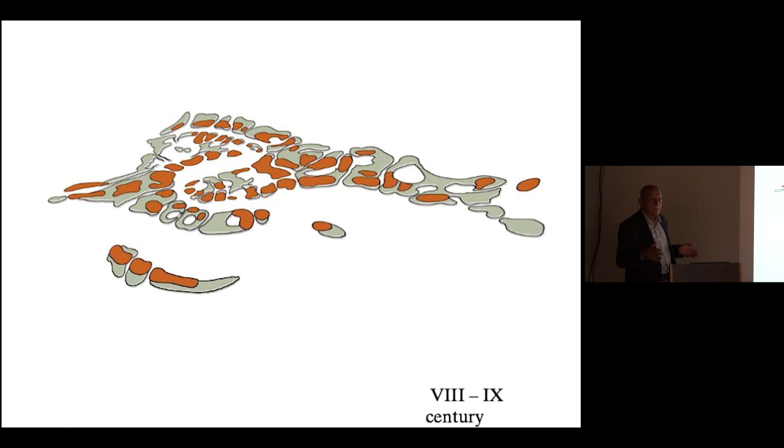And so in dark, you see the few islands emerging from the sea. The sea is not the sea, the lagoon is different from the sea. Then, going on, we have to run a little bit, sorry, because we have 171 images. So you see that in time, slowly, this reclamation of land became progressive, filling up all the gaps.

This image is absolutely fantastic. This is a pointer, maybe. No. So I have to use my finger. Look at this area here. Well, you see the little houses there, south, east. Do you see 3 lines of piles in the water of the lagoon? And what is written there is luogo da atterrar, site to be reclaimed. So this is the way of doing reclamations.

From a natural landscape, which is roundish, where they built the barracks, nearby there is a site, it's written there, the mountain of horns, because it was a slaughterhouse. They were killing animals and throwing the unused things, and so there was a mountain. But then the regularity of this, oh, here is very, very clear. Luogo da atterrare. And the mountain of horns on the right-hand side.

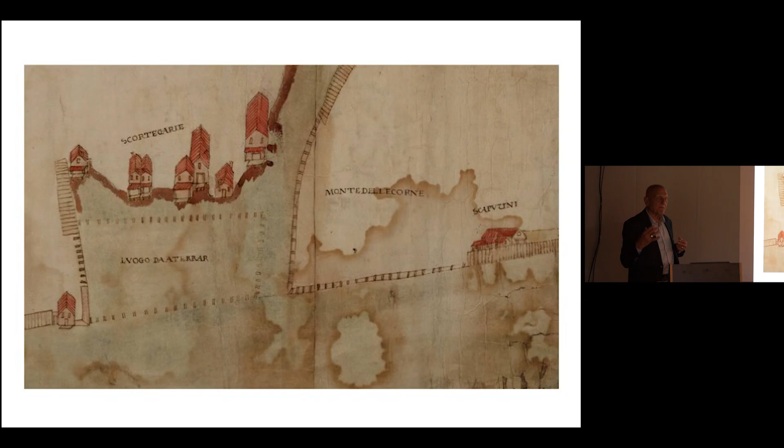So this is the reclamation of land all around the periphery of Venice, but also inside, in the city itself. The city itself, the non-city becoming city, had lakes, which were called lakes. Lacus Badovarium, the lake belonging to the family Badoer, and so forth. Slowly, slowly, they reclaimed land. How? Like that. Driving piles into the lagoon, creating a sort of a barrier, and then filling it with land.

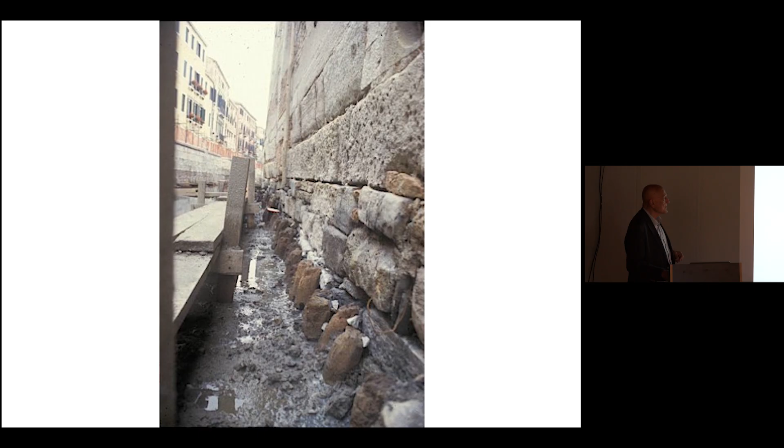Here is the same. You see the piles, you see the banging, and you see that this place is becoming an orchard on the right-hand side, and then a city. This is a limit of a bonification, of a reclamation of land of the early 13th century.

The canal was emptied to remove the mud, which is something that you should do every 10 years, because all the sewage goes into the canal. And so it fills up. And you see the piles there, creating the land to build later on the church of San Marziale. And that's the way.

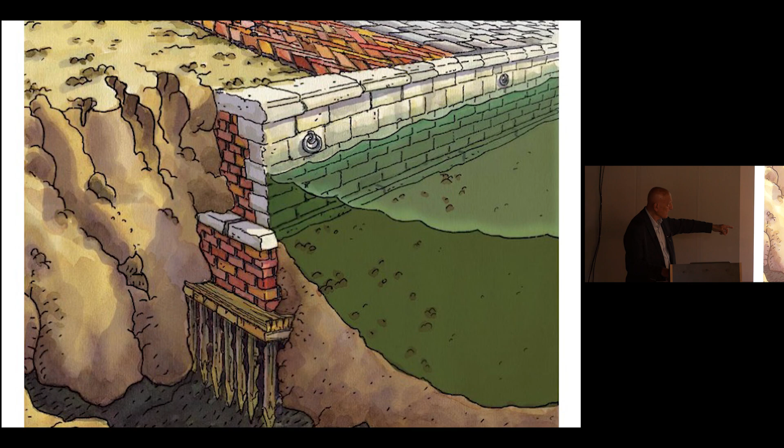You see the piles, you see a double layer of boards, thick boards underneath, then the plinth of the wall, creating a separation between the lagoon water and the land. Land to be walked on, to be built with houses, churches, palaces, and so forth. And that's it. Ca Gussoni, middle of 16th century, you see, what do you have underneath? A forest of piles.

So this is a good image because it shows you, with a script, piano delle case. It's not written floor of a palace. It's written floor of a house. So it's a minor building, let's say, facing a canal, paludo, water, and you see the piles. Piles driven one very next to the other, and then a double layer of boards. And up to it, you will build your foundation, which will reach the fascia, and the porta, which is the door of the house.

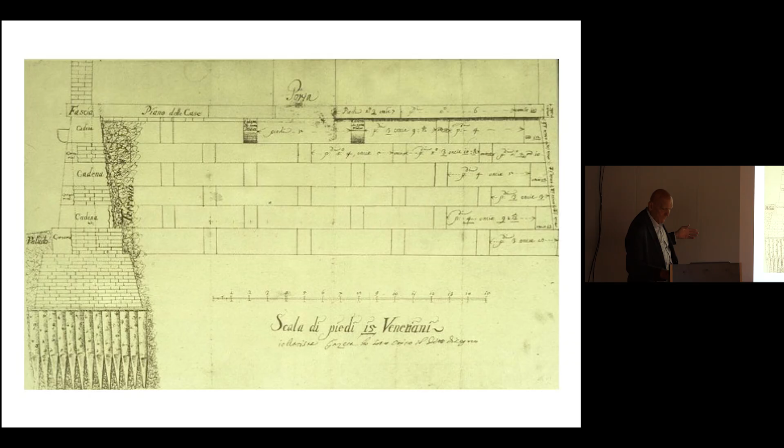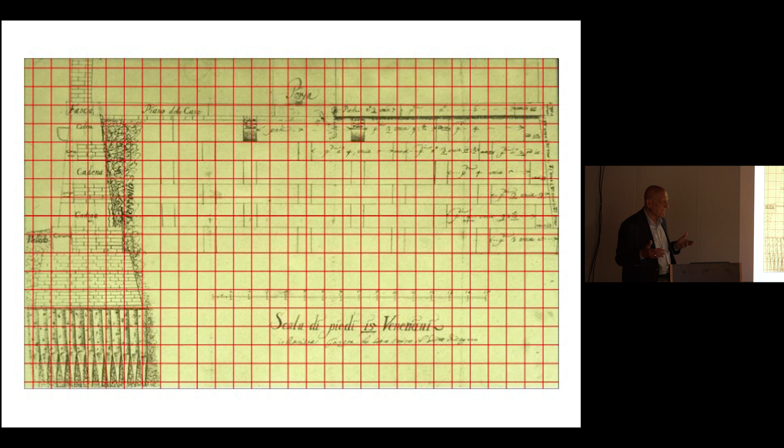That's it. If you put a measure, the squares are feet, Venetian feet. 1 foot is 35 centimeters, more or less, 34.77, somebody may say. So you can see that this foundation, apart from the piles, is 3.6 meters high, double my height, without shoes. Okay? So you can imagine the amount of work needed for such a site. The amount of materials, the amount of sweat of the workers. This is the miracle of Venice.

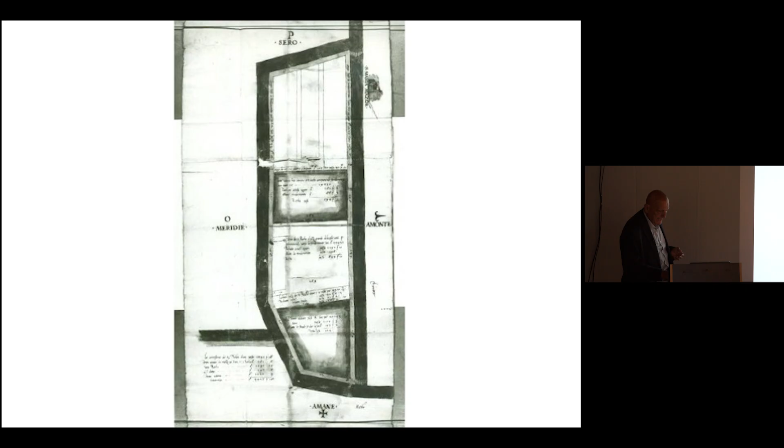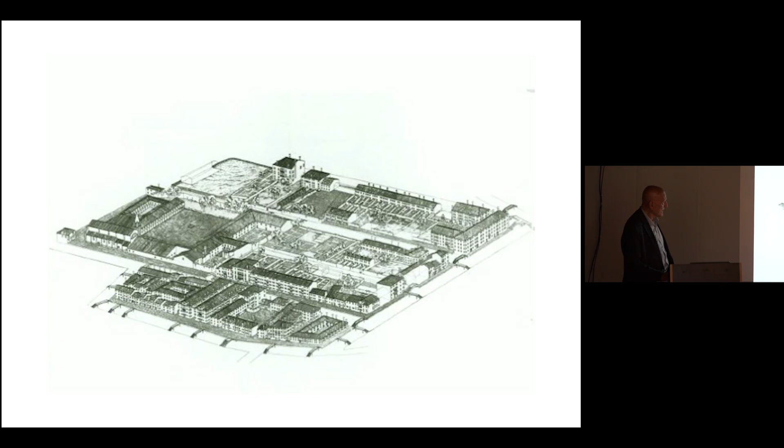Another reclamation of land is Secco Marina. You see that it looks very much like Verona, more or less. A Roman kind of planning, regular rectangles. And this was in 1523 to 30. The land was reclaimed and sold at very low price to the workers of the arsenal, because the arsenal was nearby.

And there is a letter of, again, a widow, writing to the Republic, asking for help. And she said, I'm living here with my 3 sons, and if I was not the owner of this flat, which Manoli da Candia... Manoli is Manolos in Greek, da Candia is Crete, right?

He left it to us, and I suffered a lot from the lack of water. Morimo de sete, we are dying of, come si dice, sete? Thirst, thank you. So the Republic decided, 10 years later, in 1547, to build a cistern for the poor people of the area.

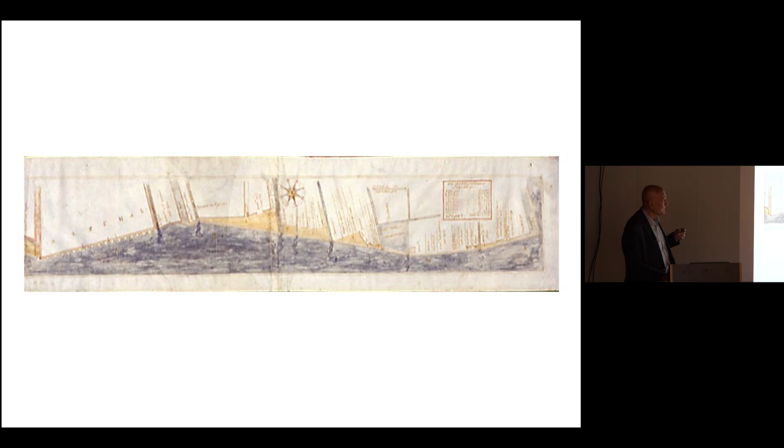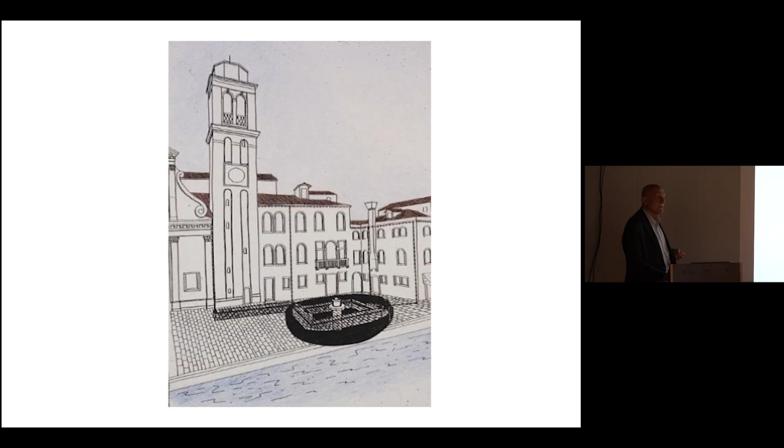Now, you may remember this, the ancient mariner. And this is the second point of my lecture, the lack of water. Lack of drinking water. So every Campo, San Giacomo dall'Orio or San Trovaso, each one has a cistern for the poor people. The cistern was self-refilled by the rainwater collected by the roofs and the paving, which went inside the cistern itself.

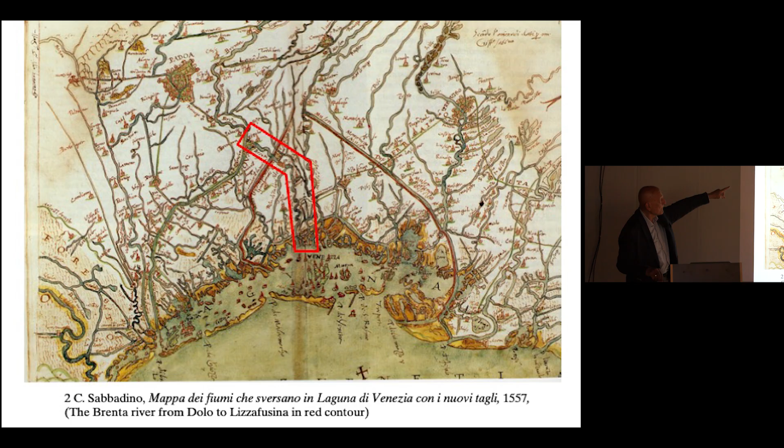The drawing is very nice. Do you have our little book? Venezia Come? Not here, sorry. You have it. It's here with me. This is one of the drawings of that booklet. We call it the booklet. I wrote it with my wife.

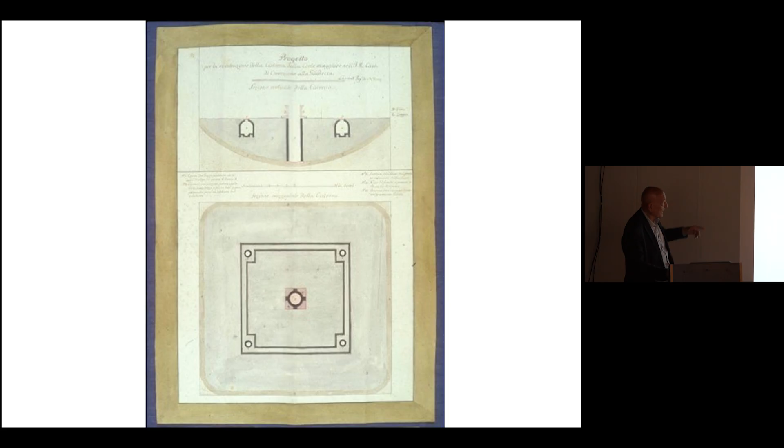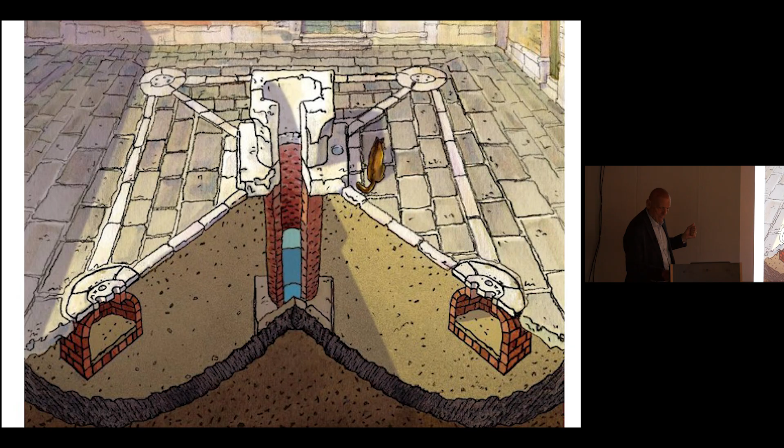So, in this case, it's a covered box. The box is built with sesquipedali, the big Roman bricks. And also the upper part, now disappeared, of course, was covered. But at the right end, you see the shaft. And you see the sand. You know how the cleaning place is called? The sand in the middle here. It was called sponza, the sponge, collecting water. So, Roman. The cleverness of the Venetians was to copy a Roman project respecting the site, respecting Venice.

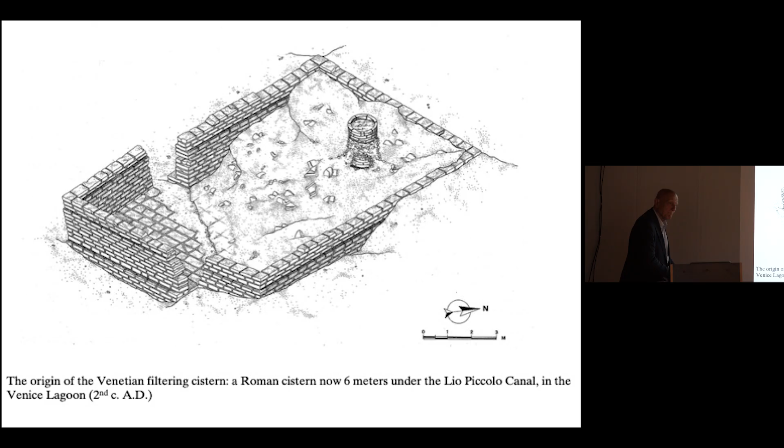So now outside in the squares, as I saw one in Cartagena de Indias, one of this kind of cisterns, also in a watery environment. But they said, if we are going to do that one, we will lose land. So they just pressed it underneath the land. And out came the Venetian cistern with the paving. Now you have a large example. This is the Roman museum in Altino. Those bricks are the bricks of the shaft. Those are the pilelle, the slabs to get the water.

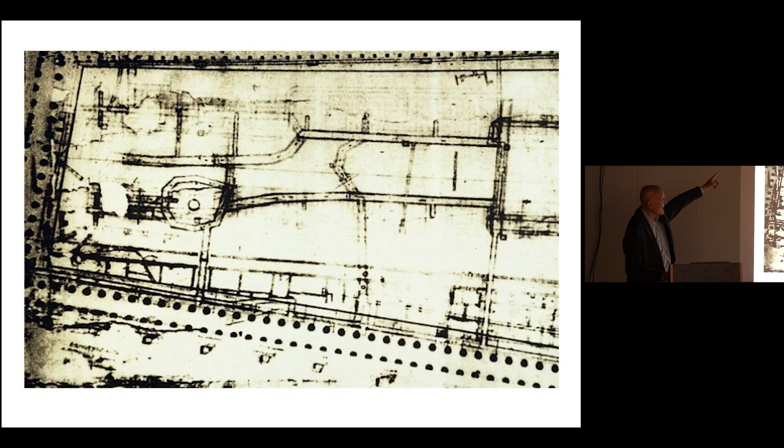Here you have the Procuratie Nuove, we're going to talk about that. The houses of the procurators, Procuratie Vecchie, and we are approaching the Basilica of St. Mark's on the right-hand side. Each palace had at least one cistern. And look at the iron ropes to bring the water from the wellhead up to the first, second, third floor. Because a bucket or 2 buckets of water weigh 20 and 20 kilos. So they would have an engine to take it up.

So in the late 13th century, there is a decree, a law of the Senate in Venice, in which all the houses, old and new, must be provided with a stone gutter. That's the gutter in stone, the white, you see? This is a medieval one, early Gothic. In order to improve the circulation of the boats in the canals, because the water was spread into the canals, but also in the streets. And I add, also to increase the collecting of fresh water. Why waste it?

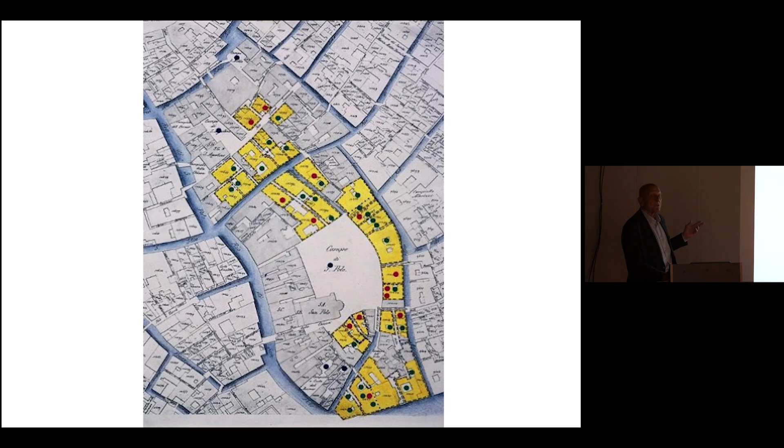Well, this is another cistern raised up because of the rise of the water in Venice, so they raised also the cistern. And when the acqua alta, the flooding, ruins the cistern, a special squad will come from the Arsenal. They will insert this primitive pump, and they remove the salty water from the cistern, and then, utilizing fresh water, they will clean the cistern, utilizing the pilelle, so all the sand will lose the salt, and that's it.

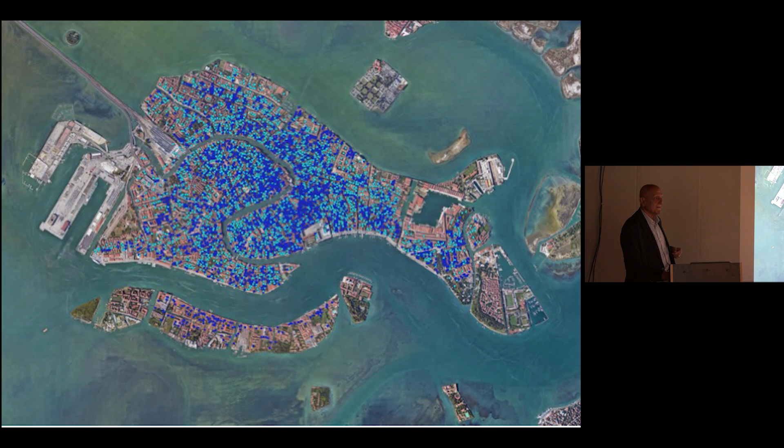This is a survey of all the cisterns. But now we have to talk about the son of Jacopo Sansovino, and he says that, you can read it.

I hate presentations when the speaker reads and also you read. So you read it and you know.

The double Venice. He simply says that because of the campi, the squares, look below it, it's in English, with that space you could build a second Venice. Another idea, the double Venice, by Francesco Sansovino.

So now we have to talk about the miracle of the double house. Listen, the double house was invented already in medieval times. Romanesque palaces with two noble floors. For the two brothers, they will share the entrance, or they may even have separate entrances from the water and from the land. Two noble floors, one on top of the other. Each one will have their own staircases because they wanted privacy.

So let's double. We even have a few remains drawn by John Ruskin of a terraced house, Gothic, early Gothic, which is double. Two noble floors. What does noble mean? It means simply higher. Instead of 7 or 8 feet, it will be 9 or 10 feet. So 3.10, 3.50 meters each floor. And then you will have a top floor, a mezzanine, for the servants, where the servants will sleep.

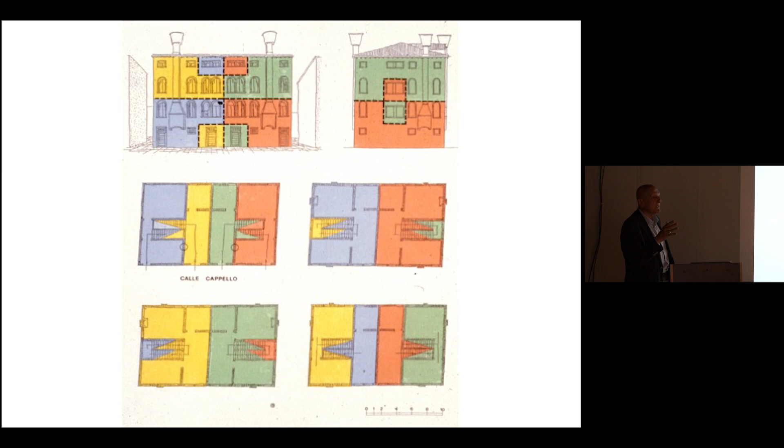As the money they paid yearly, I was wrong before, I said ducats per month, per year. Here they paid 40 ducats per year. Equal communism. Equal area, equal money, equal houses. This is a double house, which was,

this is a beautiful drawing of my master. I added the colors again, and I added the cistern, which is wrong. Don't take pictures of that one, it's my mistake. You see the gallery in the cistern? The cistern is correct. It goes between the plinth of the foundations. But the gallery, which is called il cassone, I forgot to tell you, the big box where there was the first cleaning of the water, that one is wrong.

My first article, quite thick actually, I wrote in 1983-84. It's Canoni d'acqua, canoni da necessario, scarichi veneziani in età moderna, dealing with these kind of things, the water supply, the toilets, and other things. So by that time, I was ignorant. I was more ignorant than I am now. Still a bit ignorant. Keep digging, you will find more.

Always, really. So, if I may suggest, we say, so far we know that. Okay? What I mean is, don't say, the Venetian house is like that. Because you always discover that there is another one, which is not that. It's different. But this is the model anyhow. This is the model of the double house. Could be bigger, could be smaller, but this is it.

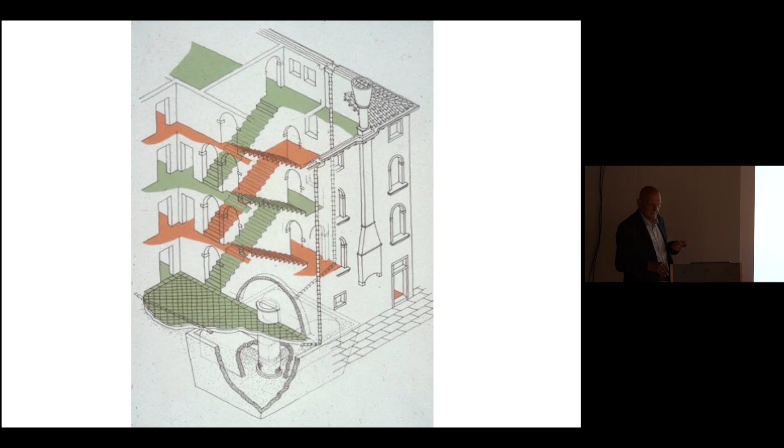And look at the shaft, cistern, wellhead, half for Mr. Green, and half for Lady Red. This is the second invention, the internal cistern and the double stairs. Oh, this is the same house as Cappello. We did this drawing in the catalog.

My colleagues were describing to you, dietro i palazzi, behind the palaces. My wife studies in the archives. She did the archival research. And we were able, with her archival research, with a team of 8 researchers, paid by the municipality's exhibition, so we had the money, it was the occasion, we discovered that the dates that my master, Trincanato, gave to the buildings were wrong.

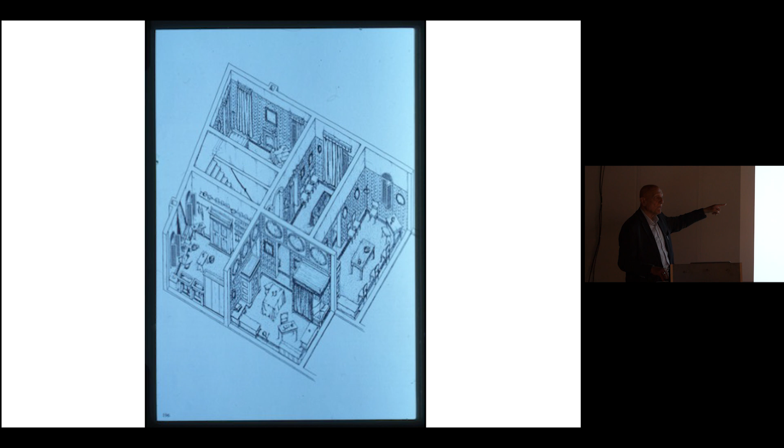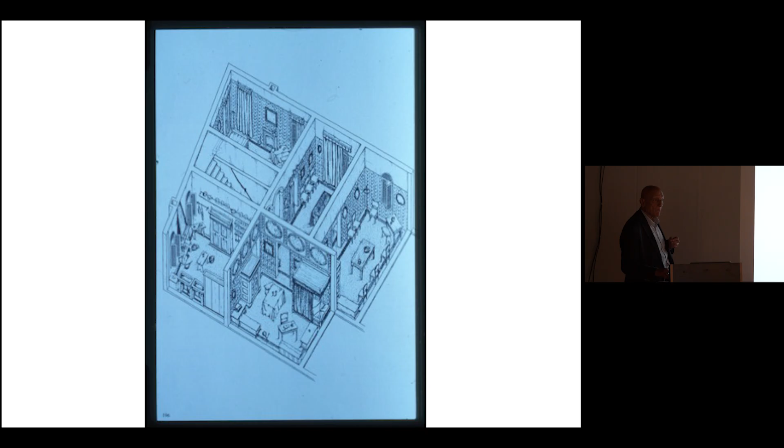She said that those houses were built in the early 17th century, but they were built 60, 70, 80 years before. So when you are studying, you have to utilize different tools in your research, not just the survey, which is extremely important, but it's not enough.

Now, how do you feel? Those houses were probably designed. We have still half an hour, okay? Yes. How do you feel? Can you survive for another half an hour? So there won't be time for questions. I propose to my colleagues, you can write me, my email is written, or you can write to the school, more official. They will collect your questions, and then send them to me, and I will answer you. So we will have more time.

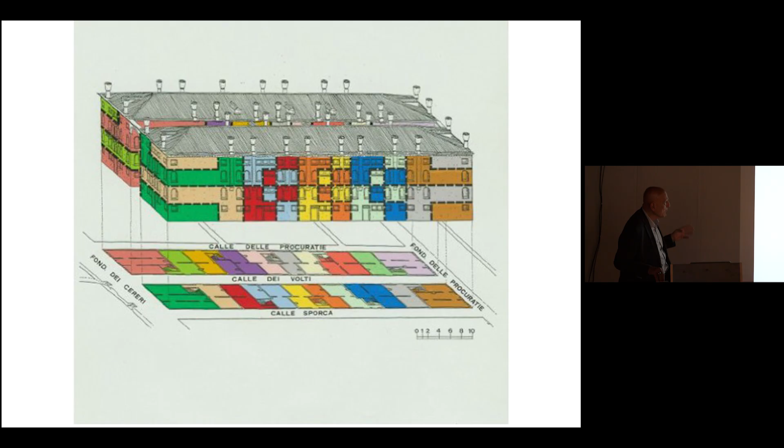So this is Sansovino, probably. It's not yet certain. The grand architect who, in the Terreni Nuovi, built those 2 terraced houses, 10 houses each. And I am very fond of this one because I found something important.

It's dangerous to dig more because suddenly a sort of geyser of salty water could come out from your excavation and it will be very hard to close it. So stop. Apart from in the quarter of Dorsoduro. What does it mean, Dorsoduro? Duro means hard. Dorso means, in this case, land.

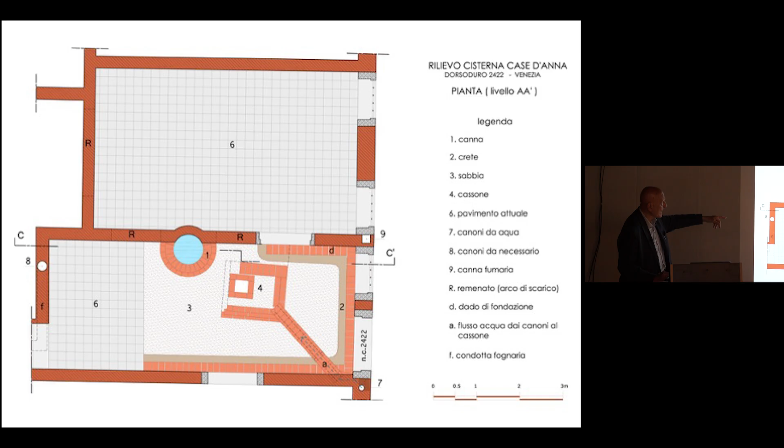So those houses have not just the first room, sand, cistern, sand, and water, but at least another 2. So altogether, you triple the dimensions of the sponge and the quantity of water that you collect. This was useful to me.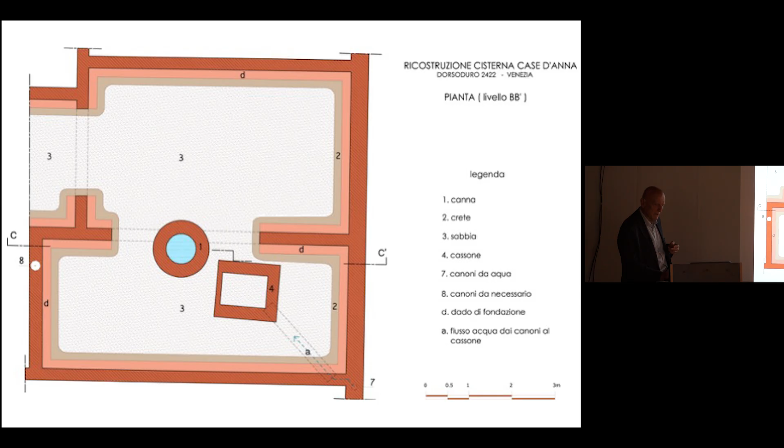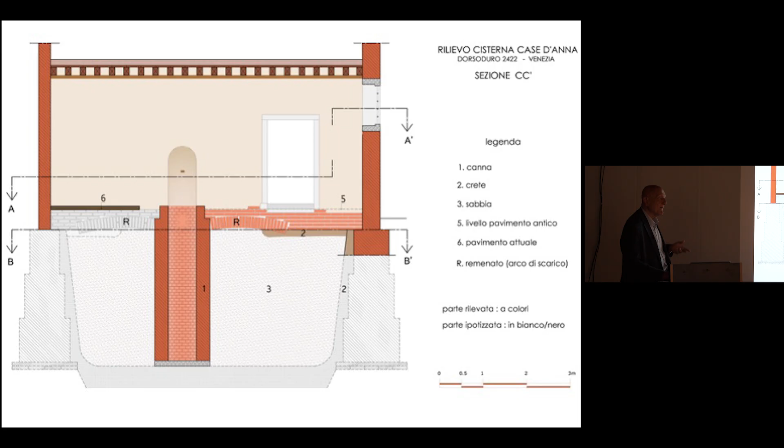I presented the project to the Kyoto 2nd or 3rd World Forum on water. We presented a project to reutilize the internal system, not as drinkable water, but as supply water for the toilets. It's a pity to use good fresh water coming from the mountains now with the aqueduct for the toilets. So that was the project. So you can see now quite clearly how a Venetian structure works in terms of foundation and the importance of the collection of water.

Now we are halfway. Now this is one of the most important buildings. It's even a monument, but it is not. If you start counting the major openings, you will see the triple windows are 1, 2, 3, and 4. The noble floors are 2, containing the triple windows, 3 bay windows, and so you have 4 tenements. Or better, in a tenement you have 4 houses, which are built on that piece of land, just with a little square. Squero is a site where they restore boats, gondolas, and things,

very near to the school, the church of the Frari, with the bell tower, and the church of San Rocco. The building is the one that you see right in the middle, behind the school of San Rocco and behind the church. Now, that's it. Piani dei Stabili, number 4. The red rectangle down below is the site, the building. And this is the area of it, the school of San Rocco on the right.

Scuola is not a teaching place. Scuola is the place where many members of society, not noblemen, citizens and poor people, were registered. There were 5,000 people, members of the school. And the school was helping them, building poor people's housing, providing dowry for the young girls who wanted to marry and were very poor, hospitals and things like that. And then the church.

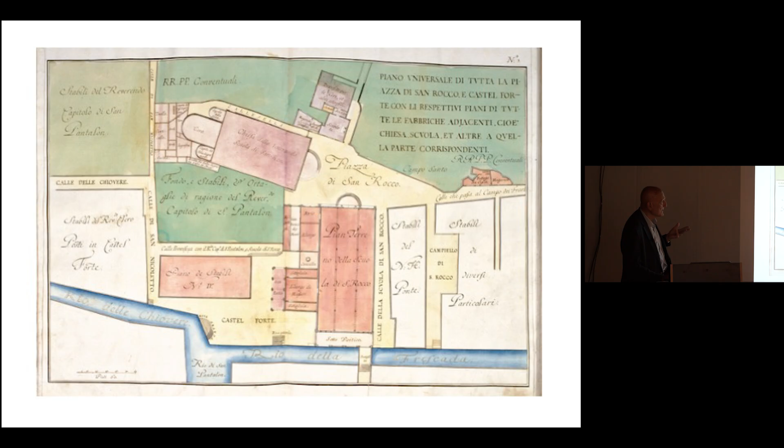Now, the architect is Lo Scarpagnino. Lo Scarpagnino came from the area of Milano. He arrived here working in the Fondaco dei Tedeschi in 1505, and the church of San Sebastiano. The school of San Rocco, he was working here the last years, and the house of the Dieci Savi alle Decime, the financial department of the Republic of Venice, after the fire.

And he did this. And he's the same who described in the year 1534 to the school of San Rocco, to the top leaders, the double house. And he says, I want to build a tenement which is of 5 houses with 2 noble floors, so that the houses will be 10. Because 5 by 2 makes 10. How do you dare explain to me, Paolo d'Anna, the head of the school, I'm doing merchandise, I know very well how to do multiplications.

And then he says each house will have its own cistern, pozzi he calls it, wells. And each one will be divided in 2, so the 10 houses will have 10 cisterns. And then he provides the height of each floor, how many feet, the composition: a ground floor, 2 noble floors, a top mezzanine, and the attic divided between the 10. And this is the birth so far of the double house.

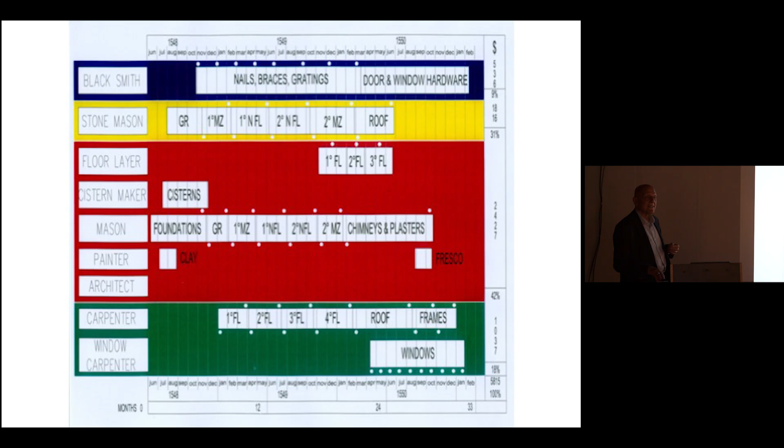If you compare the quantity of stone of a palace with the minor architecture, let's call it minor so far, but it's not so minor, you will see that what is really minor is the quantities. There is much less stone in the minor architecture than in the palaces. And stone is the most expensive building material. Heavier, farther as provision, difficult to carve and to prepare the pieces. And so this is important.

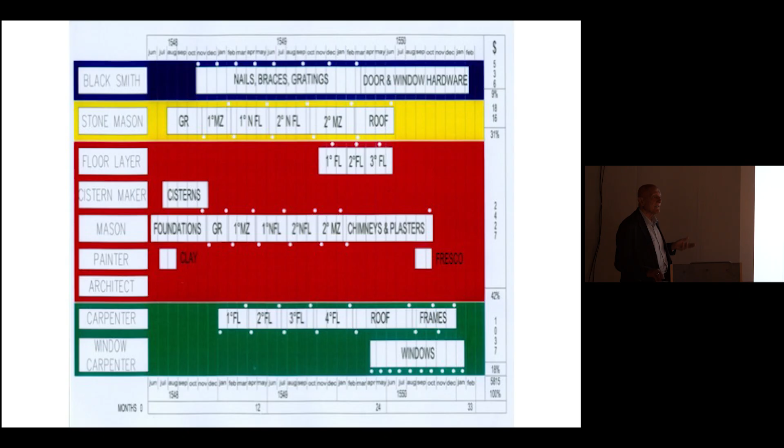In the thesis of my student, Stefano Luca, with the help of the Gantt diagram, the surveys we did, and the bill of quantities, he proposed that the entire building cost 5,800 or so ducats to the school. So now, bill of quantities, and now let's go on.

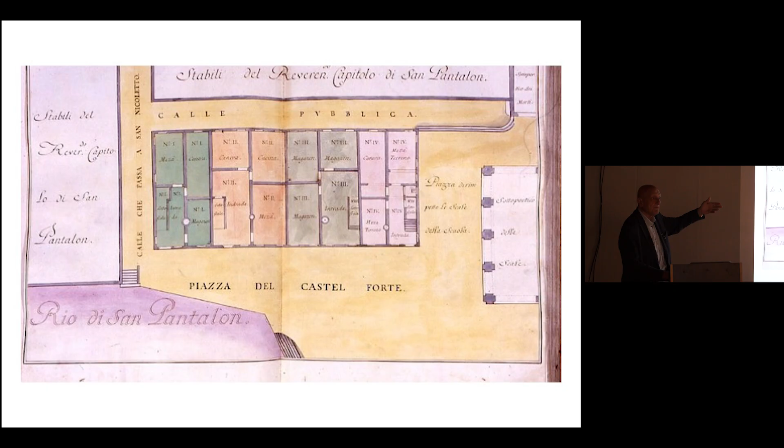This is the ground plan. From the four colors, you have the four entrances, the four cisterns. Those are the foundations. No piling here, because it was far enough from the water. Piling is very expensive. You use it only in front of the water, where the bearing capacity of the land is very poor. So a double layer of thick boards, 8 centimeters each, more or less, 8 and 8 make 16, and you build what is called lo zatterone, the big barge. It's fantastic, the word which has been used.

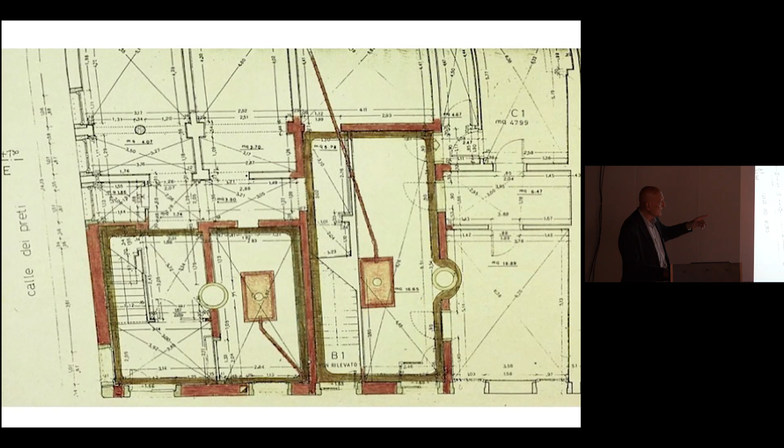The barge is something which floats, usually on the water, but in this case on the poor bearing land. And then the white blocks, you see on top of the plinth you have the blocks. That's important because they are bigger than the bricks, so they connect the foundations with the rest of the construction, and it's also waterproof. It's still there on the right. And then the cisterns, according to the survey of Engineer Giuseppe Bianco, house number 1 and house number 2.

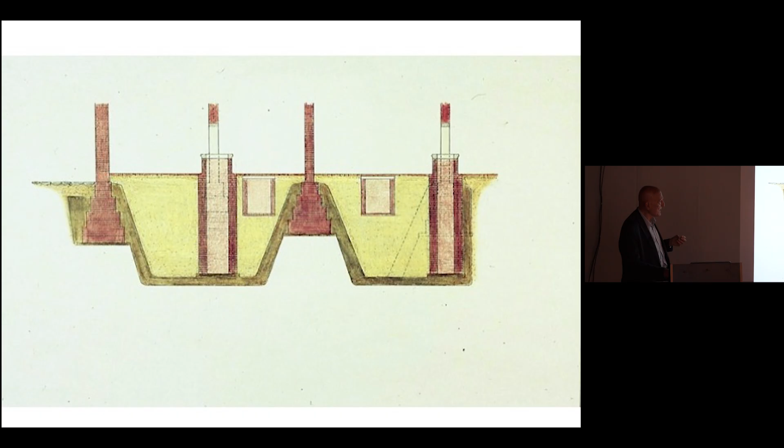So this is it. The height is perfect because it's easy to measure the height. 100 and something years ago. No mistakes. What the mistakes were in the dimensions of the sponge. This is our surveys from what I found. You see house number 4, top right.

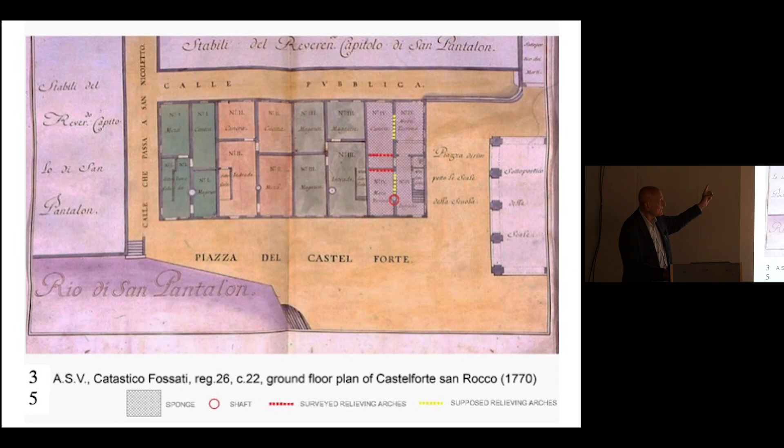We surveyed the shaft in red, ring, and we surveyed also, in the other way around, 2 relieving arches. This is a relieving arch, not there. Here you can see it better, the water coming from the red dots, coming from the roofs, and providing water inside the cassone, the big box. And you see what we imagine, what we suppose will be the foundation with all those relieving arches.

This is a big discovery, because everybody thinks, engineers, top engineers, Venetian foundations are continuous everywhere because the house has to stand. But it's not like that. From 1534. So, a cassone, another building site, a big box. This is Castelforte San Rocco. Now I will run Castelforte San Rocco, house number 1.

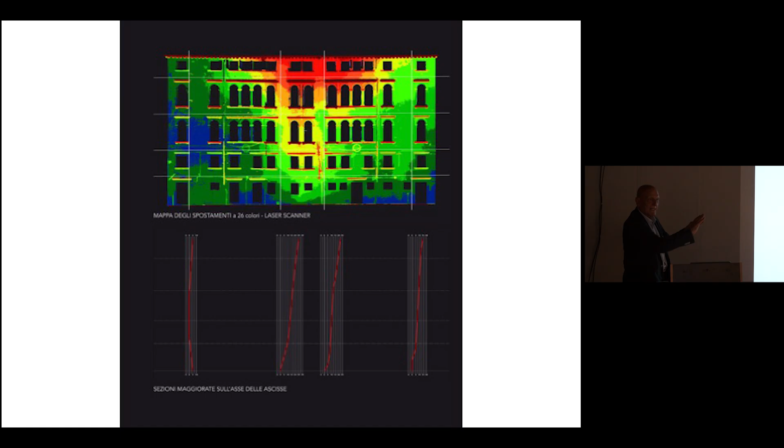This is Castelforte San Rocco. And here we studied also with the laser scanner, another thesis of a student of mine, what was going on. Red is projecting masonry. Why? Most probably, it was the timber, the beams of the roof, which got rotten. So, flattening down, they start pushing out. Important things this to understand what you are going to do.

And then, while you are building the masonry, at a certain point you start with the first windows, you insert that block of stone, the sill, with holes, and then the other 2 side stones with holes, and then you go on with the masonry. When you reach the top of it, you insert first the grate. The grill is unbreakable. Nobody can force it. It goes inside. So, sill. You take it in your hands and you put it in the holes. Then, on the right and on the left, you close it with the 2 blocks with the holes. And then you do it on top of it. Top of it, this is unbreakable.

Inferriata alla galeotta. Galeotta is the convicted, good for the galley. And you see how it works. Look on the left-hand side, you see that one bar, the upper bar, is continuous and it goes through 2 holes of the vertical ones. But the vertical ones, going down, they do the same, getting inside the second element and then the third. So it's intertwined. On top of it, you have to build another relieving arch if you want that your stone doesn't break. And then you start filling in the masonry, spaces for the pipes.

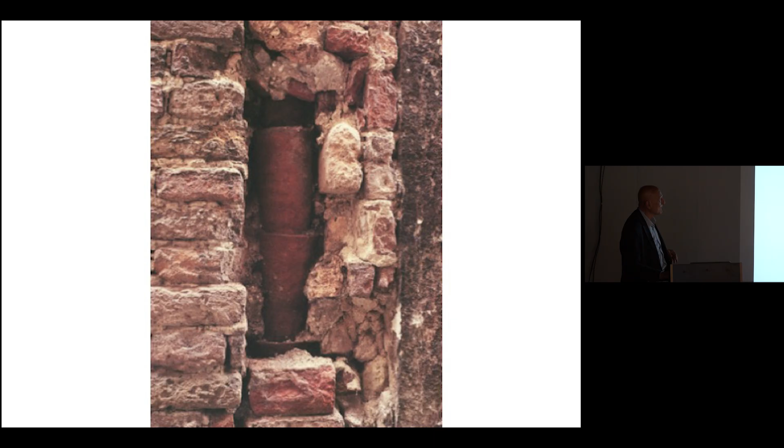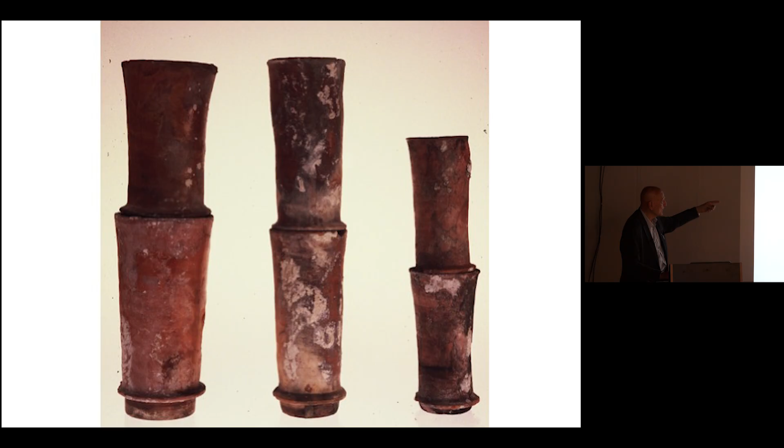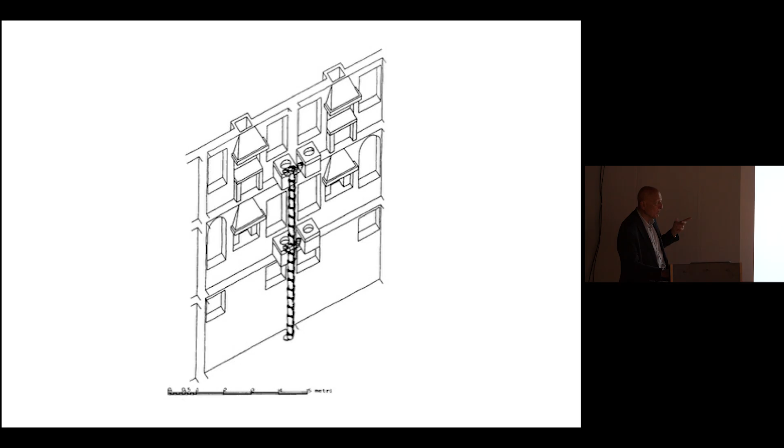And those are 4 toilets with just one big pipe element, which is 22, 23 centimeters diameter. The others are 12, 13 centimeters. They are glazed. The terracotta is glazed, so it's waterproof in both cases. This is a Venetian toilet. You open the lid and you empty your chamber pot results.

Another one. And those are the shit pipes of the Fenice Theater. I found them during the restoration. I was working in the restoration before the fire. And so, members of my collection, they will go in a little museum in Castelforte next year.

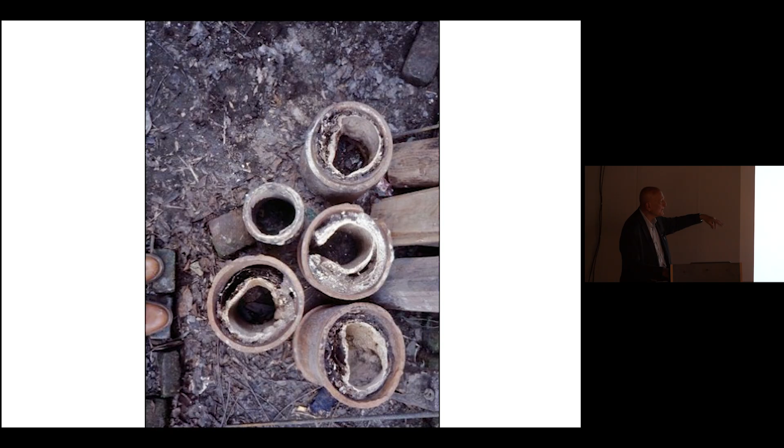And look at the pipe, the shit pipes. They are half external and half internal. So now the two bottom are big ones. The white thing is the washing machines, the detergents, but the internal, no, it's not the churn, it's other stuff. And the exhaust is in the canal. And it's fantastic, the fact that

you're reading a bill, 1558, describing what you intend to do in your project. You are the architect. And you say, the foundations, the plinths will be from 5 to 6 feet high. Depends on the land you are going to encounter. But in any case, the zatterone, the barge, will come out half a foot from the plinth.

And now in this case, you see more clearly that this is the limit, which is half a foot. When there is a combination between the written description and the reality, you know? I got very much excited with this kind of things, but maybe I am a little bit maniac about it. Anyhow, the level of the exhaust must be lower than the minimal sea tide, of course.

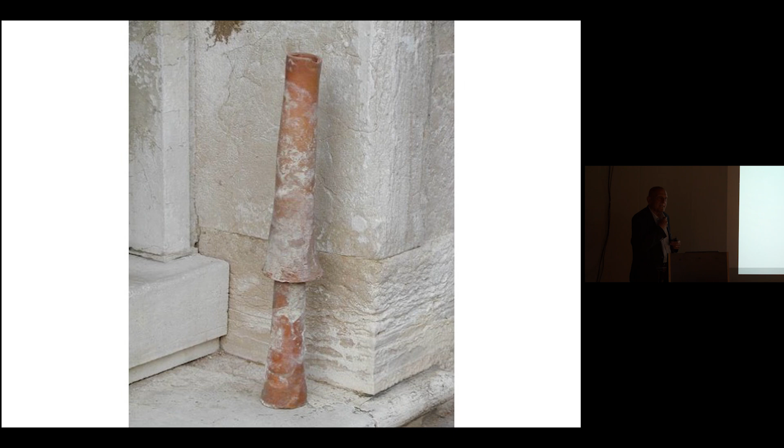But there are other pipes. Those are reverse inserted in this way into the masonry, and they are called cannoncini, little guns of campanello. Inside there is a, come si dice? Bell. For the bell, yes. Look, house number, the bell.

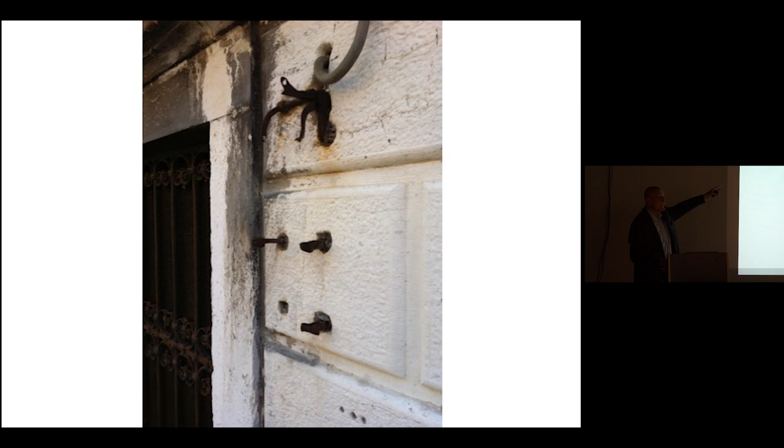Well, you don't see the bell, but you see the place where there was the handle of the bell, on the right-hand side, near the campanelli, right? That piece of iron on the right, another one lower, and on top of it, the external support for the movement of the iron string. Here you see it better. The handle was down below, two handles commanding two different bells. And here, in Castelforte San Rocco, second noble floor, you have the surviving bell.

And this is it. This is the first noble floor. And now you know why the two external bays of the building of Castelforte are bigger than the central ones, because you have to fit the staircase in that. And the staircase, let's talk a little bit later.

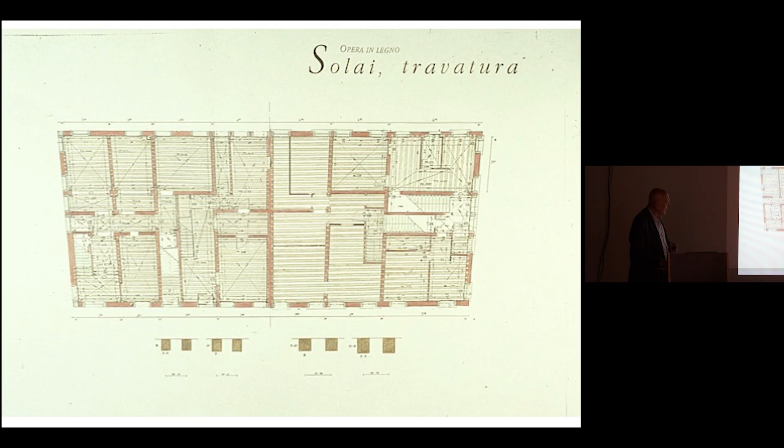Those are the beams of the floors, very well surveyed by Roberto Vaglio. And you see, it's like the bridge of a ship. They're very close one to the other, as described in the treatises of Scamozzi, for instance, who gives you the dimensions of the beams.

Here, another document, 1558, which explains that the floor will be done with the beams, double layer of boards, iron cramp on the boards, nailed into the boards and the beams, look at this section, and inserted the end of this metal piece of connection into the stone, which is number 2. Fiuba. Fiuba means the, come si dice? Belt. This is the fiuba. And that's a nice drawing of a student.

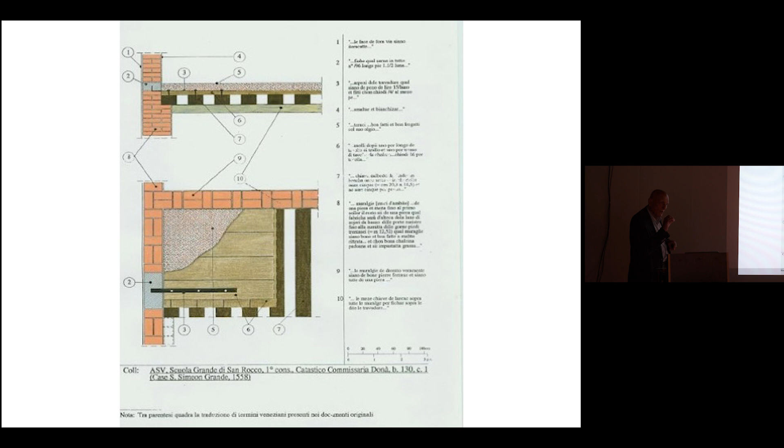And you could say that you disagree with this drawing. Look at the cross-section. You see that the height is inferior to the base of the beam, right? I mean, the base of the beam is larger than the height. But this is Galileo Galilei, our genius, who studies what happens to a cantilever with a certain load, E, and what is the representation of this beam? Wrong. So it was the way to build up to at least the late 17th century, when the mathematical theories of building science started growing.

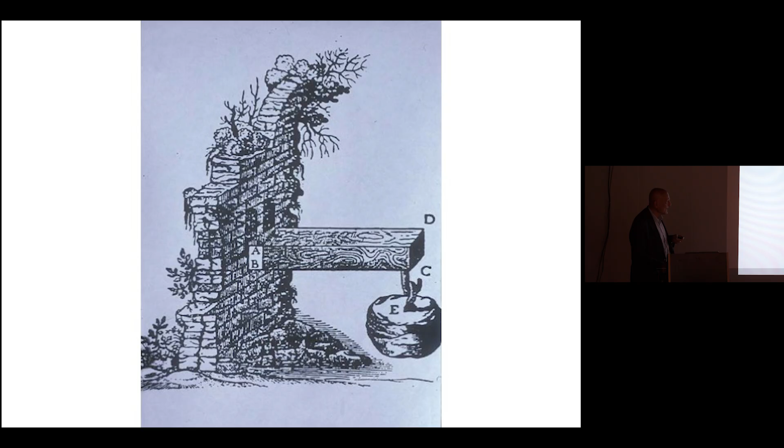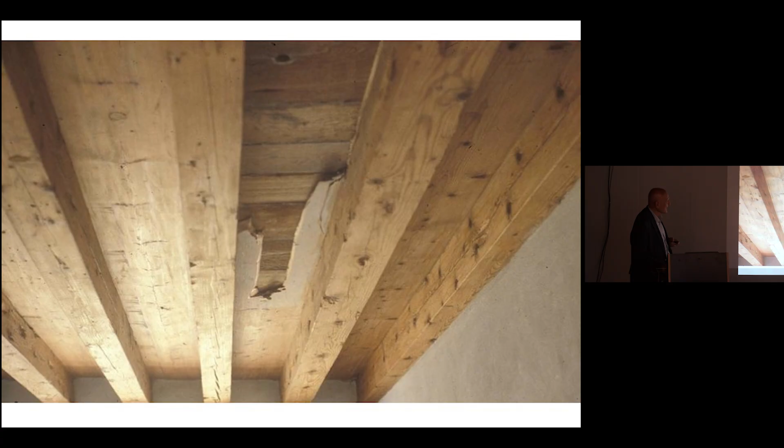So, a sawmill in Austria, and I did that to discover how they were posed. The double layer of boards. And this is the link between the floors and the external walls, which is very important. You have to link them. You see them? Look at the right image.

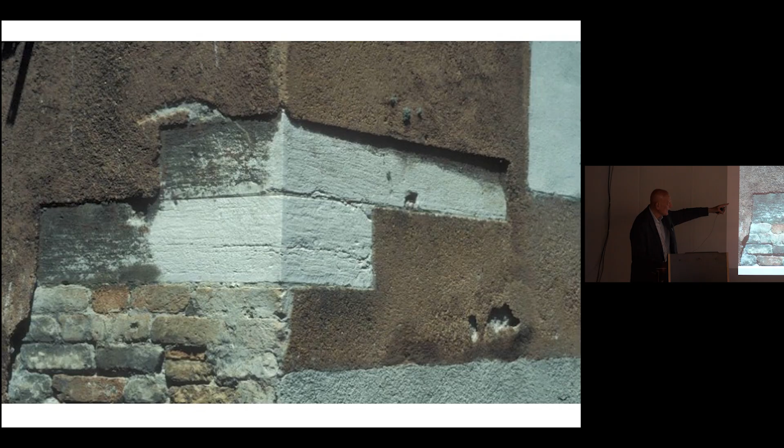The piece of stone is a reverse end of a Gothic window, reused. And that's it. You can see from that little brownish color on the right, first stone chain on the right, and another one here, less visible, on the left. They are crossed, like in my bathroom during the restoration of my place. You see, they are crossed, internal and external.

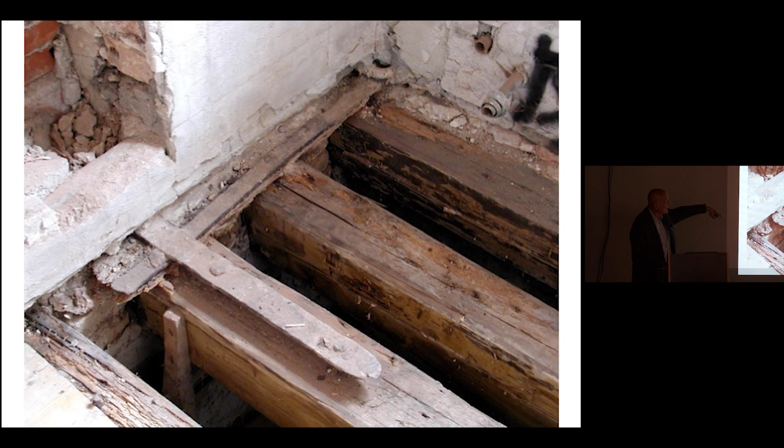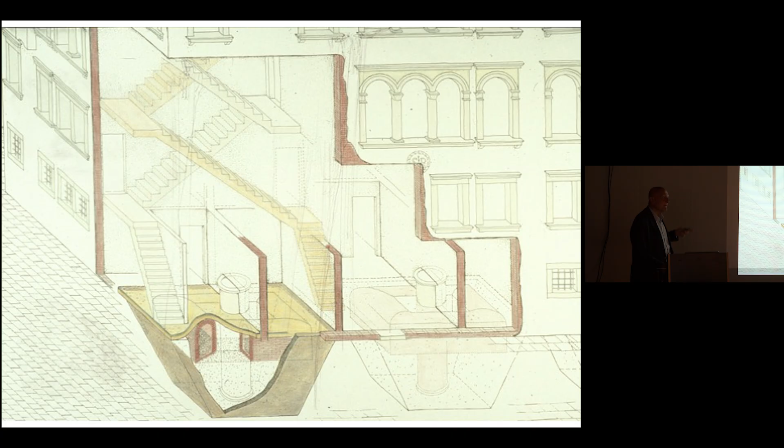Now, the major windows of Castelforte San Rocco, and we continue with the stairs. Now, those are the stairs. Again, don't take pictures of the cistern, it's wrong, sorry. And what is correct are the staircases. The staircases here, well, I will go by memory because we don't have time. Leonardesque, they are called the Leonardesque staircases.

If you go in a department store, you will see them with escalators. Just insert two masonry walls in the middle, external and internal, and you have created the double stairs. So they were invented by Leonardo da Vinci in the Château de Chambord for the King of France. This is a double stair of the castle. One for the landlord and one for his tenants.

Now, those are the stairs, double stairs, surveyed by a Proto just a few years later, the construction of the stairs on the project of Scamozzi. You may have heard of Vincenzo Scamozzi. He wrote a treatise of architecture, The Idea of Universal Architecture, 1615, Venice. And there he explains lots of things. For instance, he explains the dimensions of the beams in case of a certain span.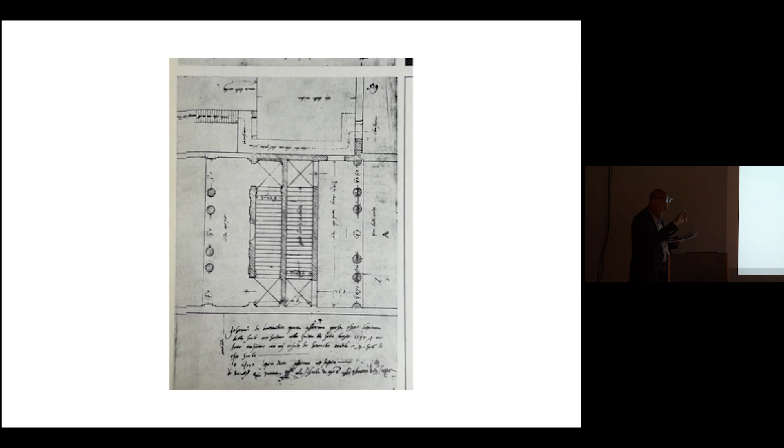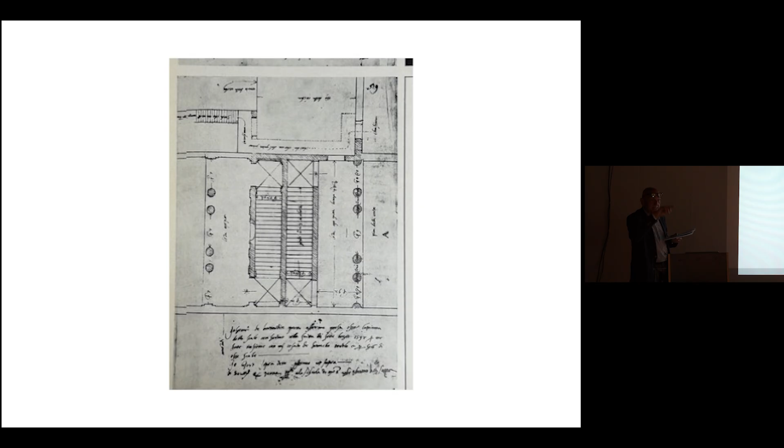the steps to reach the first noble floor are 46 here. And the height is 6 meters 95, almost 7 meters. I am a procurator. I am 70. I can't walk. I can fall down by the stairs. But Scamozzi wrote, the base of the flight will be divided into 2, that will be the height. So the height will be half the base. So that the pendenza, the slope, will be 50%. Now, and this is the cross section.

They complained, we are senior people. Because to reach the second noble floor, they have to reach 14.78 meters, almost 15 meters. They have to walk 95 steps every day, every night. So it's hard work. But it's respected. Now, if we compare this with the stairs in Castelforte San Rocco, this building, approaching the Swiss Foundation apartment, second noble floor, house number 2, the slope is 85%, from 50 to 85. That's why the 2 side bays are longer than the middle ones. You need space for that.

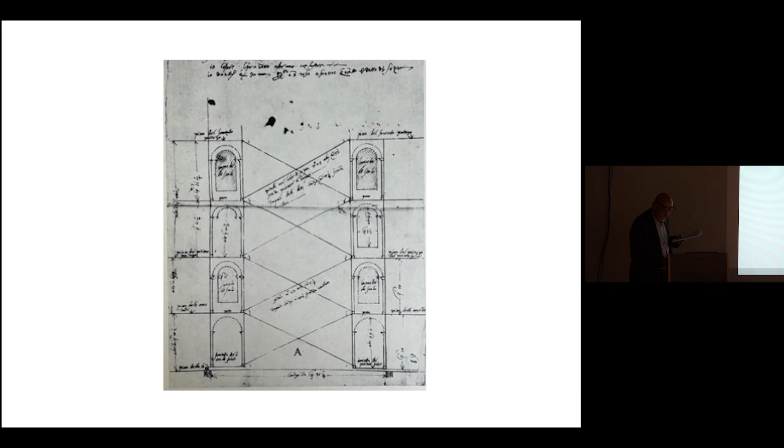Now, those are double stairs in Castelforte San Rocco. Let's run in another building. Again, we are back in Castelforte San Rocco. They were built in wood. The flights were in wood. But then early 17th century, a nearby building was burned. The people were killed because they couldn't escape. So one of them said, I want to pay with my money the conversion into stone, and they did.

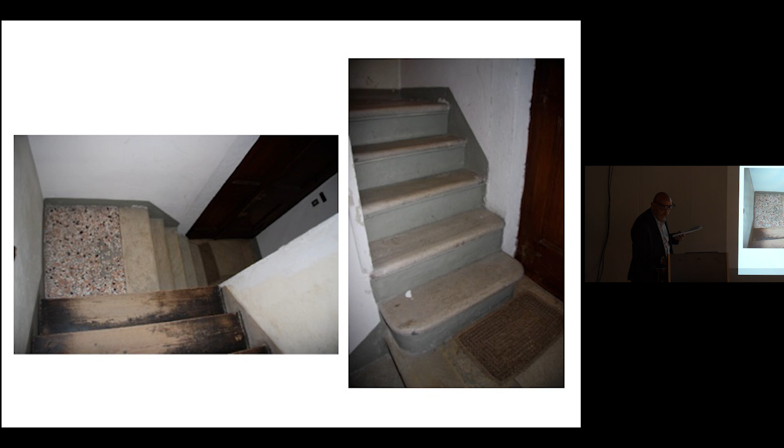And then when Napoleon arrived, he sold at public auction all the apartments, and the apartments started their division. There were 4 houses, now they are 18. So those are inventions, fantastic inventions, in order to utilize the same stairs with a mini stair at the landing.

And this is the thesis of Roberto Vaglio, and you can see the little white spots where you have the stone elements on the facade to link the floors with the vertical masonry. So in case of moving, the iron chains will start pulling. And so it will be a balance between the two actions.

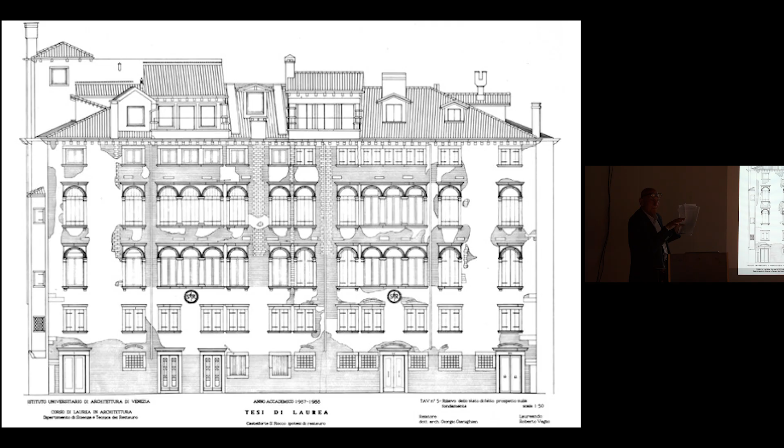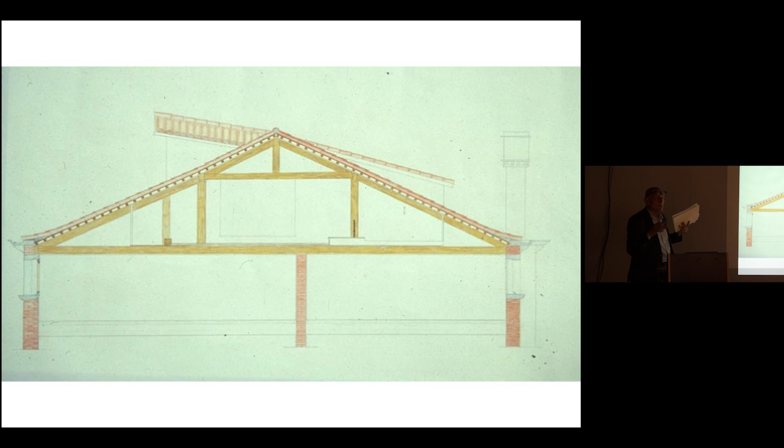The roof of Castelforte, with many changes, of course, in time. And this is the cross-section. When you see that, it's like an oriental roof. The two final elements are roundish, like a pagoda. Why? Well, to reduce the speed of the water so it doesn't go over the two gutters. Because after that, inside the walls, you will have that.

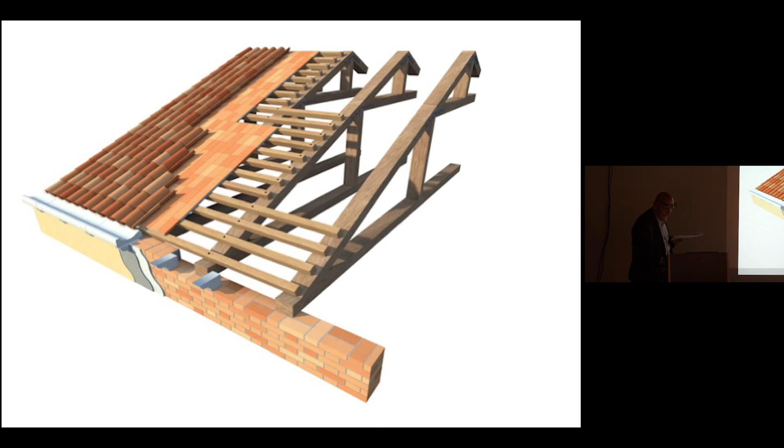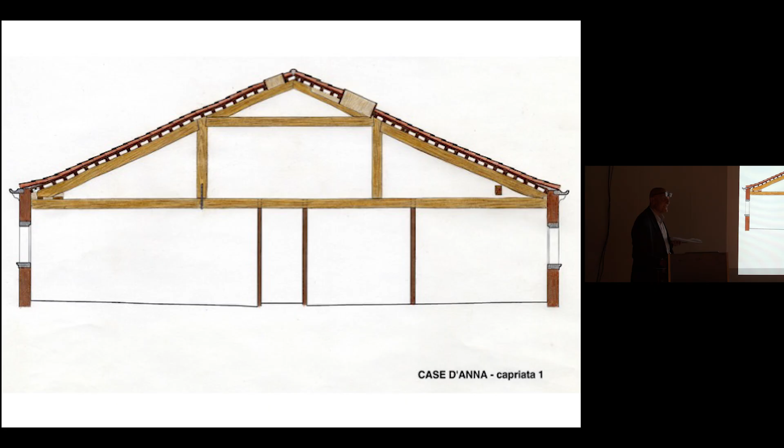Now, this is how one of the Castelforte roofs was built. 13 trusses, right? Plus the minor semi-trusses on the sides. That's it. Today, how is it? It's still there. Another building. Again, you see that the sloping of the roof is oriental, not because of Marco Polo, but simply to reduce the speed of the water.

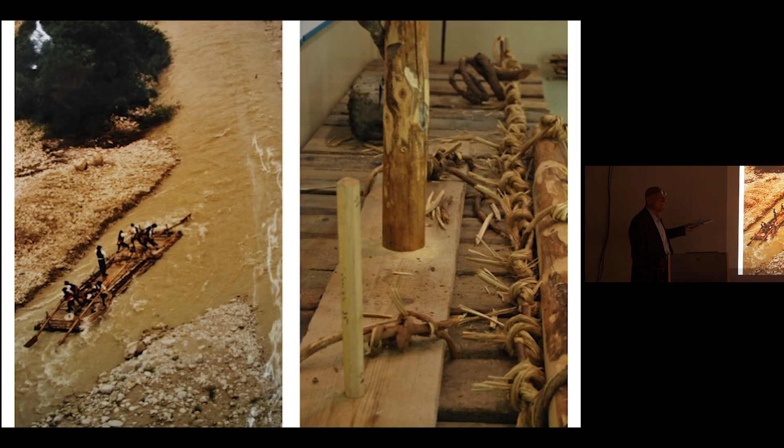Internal restoration, the wood coming from the Dolomites, fir tree, red fir, and larch tree. They came from the forests, cut during the winter, taken down to the river. No, throwing the trunks, i tronchi, by floatation to the sawmills. There they were cut into beams and other wood elements. The beams were put together in order to create the barges.

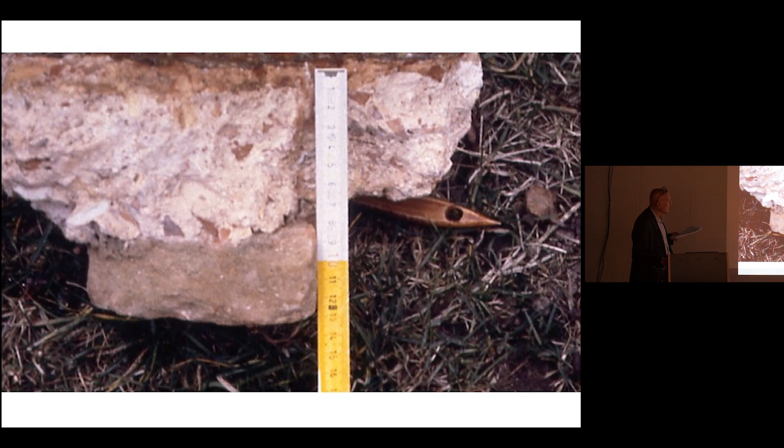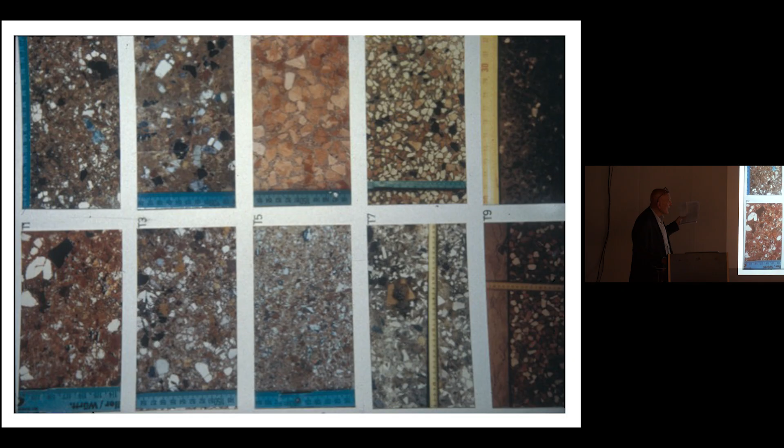So this red color was very common in Venice. And this is the terrazzo floor. This is one piece of the terrazzo floor, and there are 10 different kinds of terrazzo floor in Castelforte San Rocco. The darker are with the cement, the lighter, more old, are with the lime mortar.

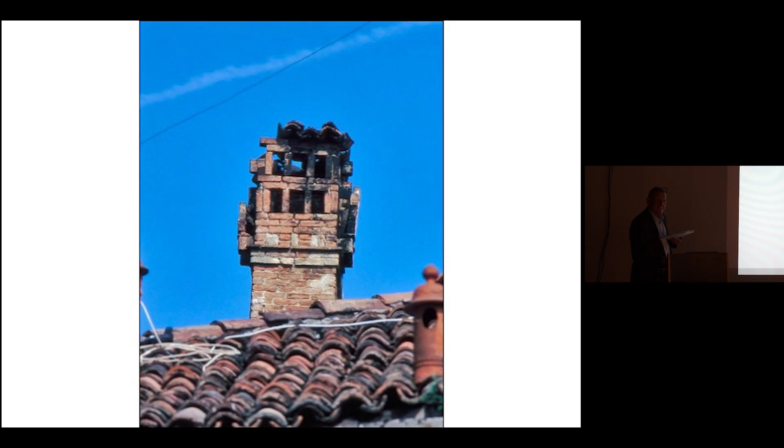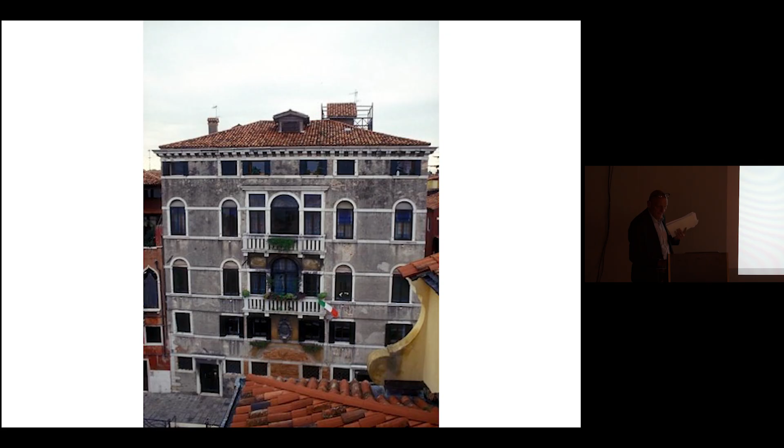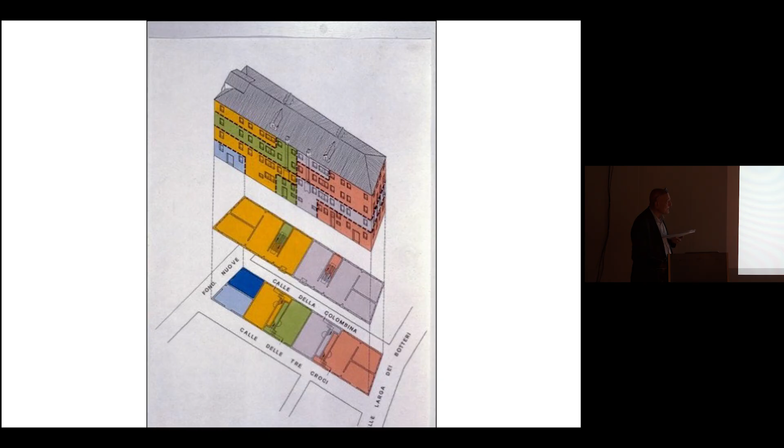This model, the double house, was very, very popular as an investment for the changes of economy from the ship economy, the merchandise economy from the East, because the Dutch, the English, the French, the Spanish, they started dealing in the Mediterranean Sea. And so the power of Venice was reduced. And so they invested in the mainland, building the villa. But that's another project. This is 1609. Internal system. You can see the half shafts in the ground floor.